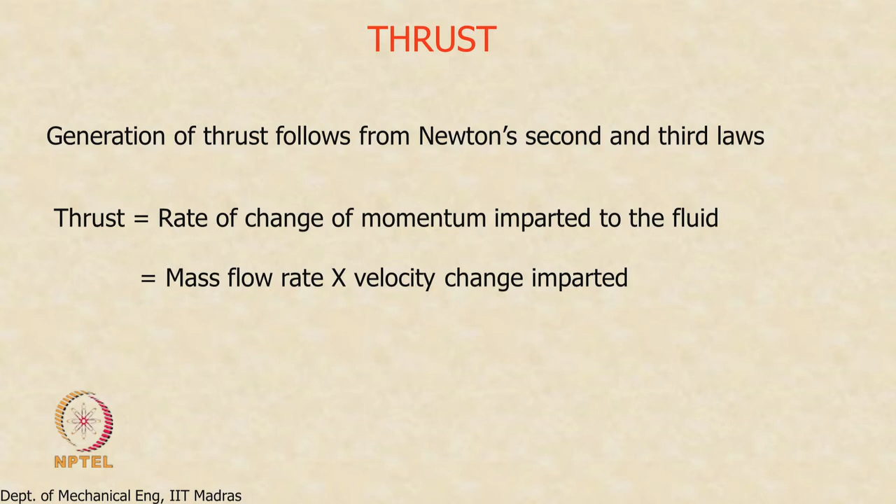Now, because thrust is the product of two terms, this offers the scope to develop engines which can develop thrust in two different methods. One is to keep mass flow rate very large and try to impart a small velocity change. The other strategy is to keep the mass flow rate reasonably smaller, but keep the second term quite large, imparting a large velocity change to a small mass of air. These are the two strategies possible, and if you look at how the engines were developed historically, you will see these are the two branches along which propulsion technology developed.

So we start with the requirement of generation of thrust, and historically thrust in aircraft engine application has been generated by two devices: one is the propeller, the other one is the jet.

Now the propeller, here is a view of a modern turboprop engine, you can see the propeller here. The propeller is very large, there is no duct surrounding it, it operates in the open atmosphere. Because the cross sectional area or tip diameter is so high, the propeller will suck in a large amount of air. So the propeller works on the first idea, impart a small velocity change to a large amount of air. It takes in a large amount of air and generates thrust by imparting a small velocity change to it.

Notice that the modern turboprop engine uses a gas turbine engine to run the propeller. It does not use a piston engine, this is actually a small gas turbine engine. So the propeller is directly coupled to the shaft of the gas turbine engine, and the engine runs the propeller.

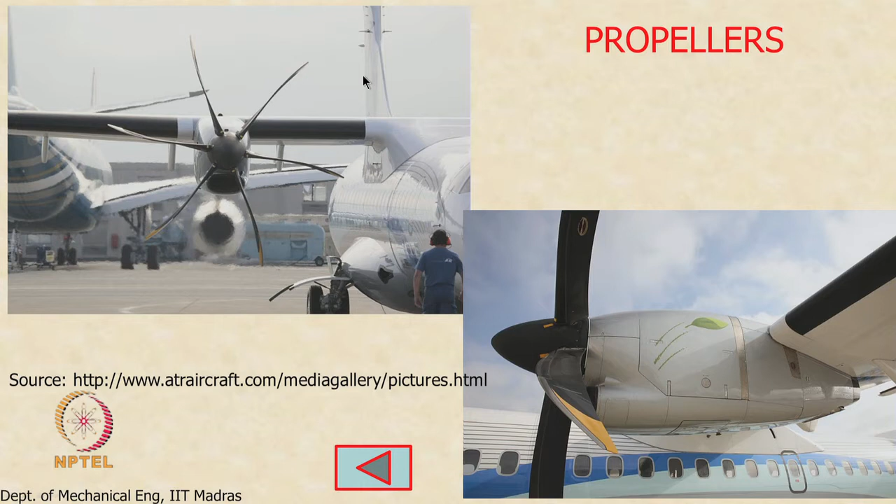That is why I said this is cold, and this has very significant implications later on. We will now turn to this and see what this does. Now the jet engine uses the opposite strategy. Here m dot is small and delta V is large. So it imparts a large velocity change to a small mass of fluid. That is what a jet engine does.

How do we do that? How do we accelerate gas to high velocities? This is a simple thermodynamic problem. We increase the specific enthalpy of the gas. As we discussed earlier, the specific enthalpy of a gas is nothing but U plus PV, where U is the internal energy, P is the pressure, V is the specific volume. There are two terms in this expression.

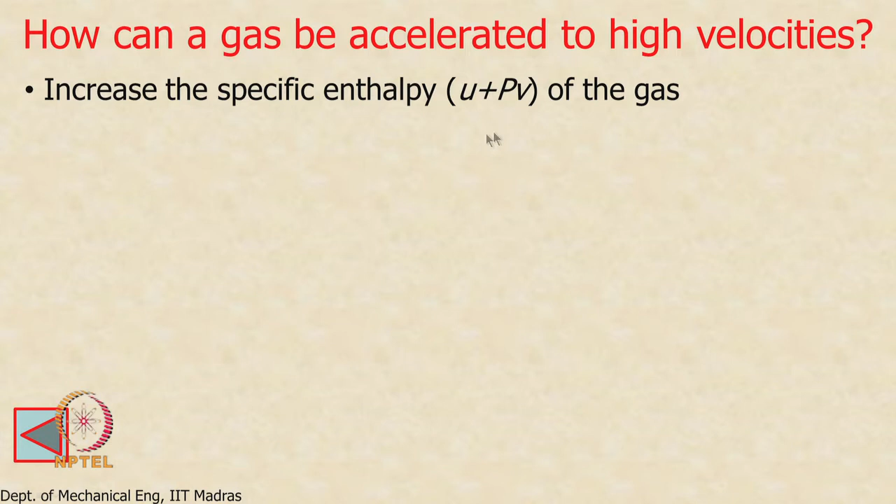So we can increase the specific enthalpy by exploiting or increasing these two terms. Once I increase the specific enthalpy, what do I do? I convert the enthalpy of the gas into kinetic energy. That is how I accelerate a gas to high velocities. How do I do these two things? That is what we are going to look at next.

So how do I increase the specific enthalpy of the gas? If I look at the second term, I can increase the pressure and increase the specific enthalpy, or I can increase the internal energy. How do I increase the internal energy of an ideal gas? As you know, these are almost thermally perfect gases, so the internal energy depends only on the temperature. So I increase the temperature, I increase the specific internal energy.

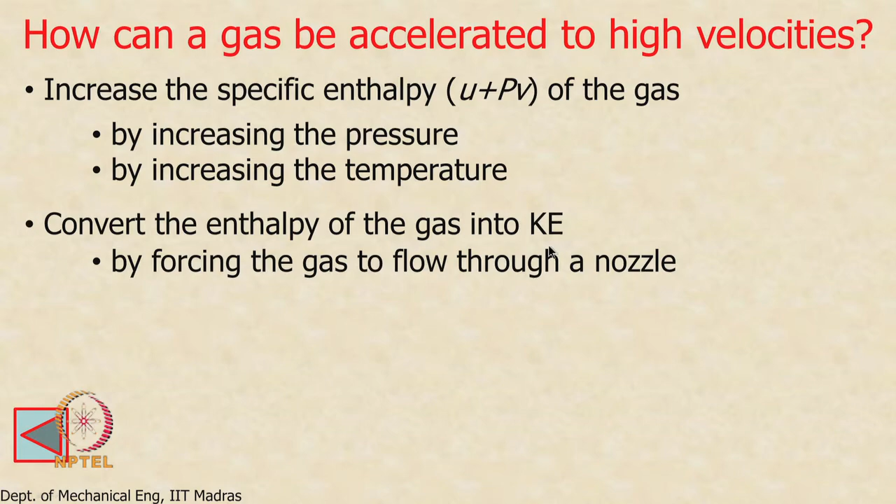So basically the gas turbine engine does two things. It increases the pressure, it increases the temperature, thereby increasing the enthalpy, and then converts the enthalpy into kinetic energy in a nozzle. How do we do this? We force the gas to flow through a nozzle where the conversion of enthalpy into kinetic energy takes place. So here is a look at a propulsion nozzle.

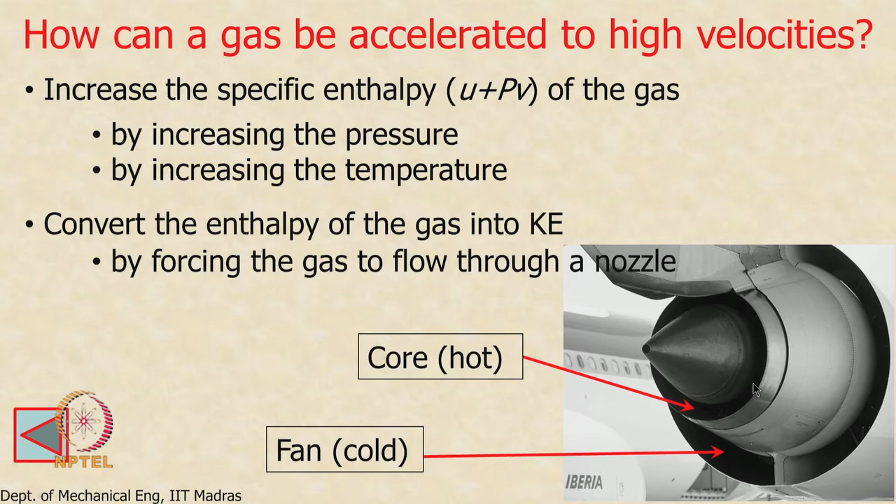By forcing the air to flow through these nozzles, we have already seen nozzle flows and applied the impulse function to evaluate the thrust. The enthalpy is converted into kinetic energy, and as the air leaves, the momentum imparted to the air is felt as thrust. We also said I can calculate the thrust by looking at change in momentum or by integrating the pressure on the metal surfaces of the engine. Both are nothing but Newton's third law.

That is how gas can be accelerated to high velocities, and a small mass of gas when accelerated to large changes in velocity can also produce thrust. This is how a jet engine produces thrust. So this is the difference between these two: jet engine has a smaller m dot, larger delta V; propeller engine has larger m dot, smaller delta V.

Historically, propeller engines have been driven either by a piston engine, around World War II, or, as shown now in modern times, driven by a gas turbine engine. This was before World War II, and the gas turbine engine, which is used today, is a turboprop engine, as I showed. These are driven by small gas turbine engines, and they are very efficient. Now jet engines, for the jet engine to operate, it needs a stream of high enthalpy gas.

It needs a stream of high enthalpy gas, which it will then force through a nozzle, converting the enthalpy to velocity. This requires an engine to supply high enthalpy gas, and that engine can be the gas turbine engine. In one case, the gas turbine engine produces the shaft power required to drive the propeller, whereas in the other, it gives the high enthalpy gas stream required to generate thrust. That is the difference between these two: one provides shaft power to turn the propeller, the other provides a high enthalpy gas stream used by the nozzle to generate thrust.

Now, the gas turbine engine itself has several variations. Turbojet is the simplest possible. Turbofan is a modern engine, which we will also look at. The afterburning turbojet is a variation of the turbojet engine, slightly more complicated, with additional functionality for the nozzle, which we will look at too. There is also a derivative called the turbo ramjet, which is a combination between a turbojet and a ramjet engine. We will look at this technology as we go along.

Now, there are engines that operate as both ramjet and scramjet, because their flight Mach numbers are higher. They can use supersonic intakes, properly designed, to decelerate the air and compress it. Remember, two things had to be done to the air to increase specific enthalpy: one was increasing pressure. In these engines, this is done by decelerating the air itself, so the momentum of the incoming high speed air is converted to pressure. That is what these two do. So they do not need a compressor, and consequently do not need a turbine either — they have no moving parts.

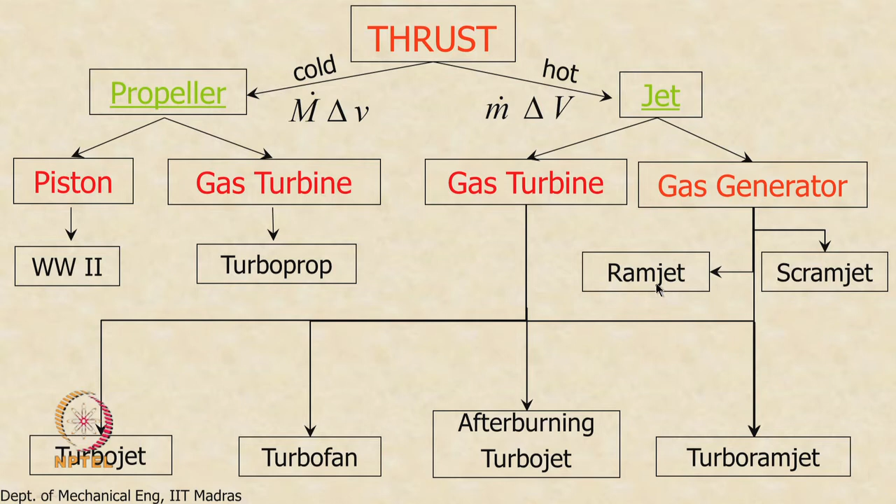We will look at each of these engines and have qualitative discussions in the beginning. Then, towards the end, we will try to do thrust calculations for a turbojet engine, a turbofan engine, an afterburning turbojet engine, and a ramjet engine.

Now, here is a slightly different taxonomy of propulsion technology based on flight Mach number. What we looked at earlier was a taxonomy based on chronology, how the technology developed over the years. Here we are looking at a different taxonomy using flight Mach numbers. Propellers typically are constrained to flight Mach numbers of about 0.5 or so. Even turboprop planes today usually fly at altitudes only around 15,000 feet, no more, because their flight Mach numbers are restricted to about 0.5.

Now, a turboprop is in that range. A turbojet and a turbofan typically operate in the high subsonic Mach number range, around 0.9 to 0.95. These typically fly at altitudes of about 35 to 40,000 feet, or maybe slightly more, because their flight Mach numbers can be high subsonic, so they operate at higher altitude.

Now, the afterburning turbojet can actually accelerate to supersonic speeds whenever required. It may not cruise consistently at supersonic speeds, but for short duration, by turning on the afterburner, you produce extra thrust and can breach the sound barrier and attain supersonic speeds — but not sustained supersonic speeds. This is not the way to go if you want sustained supersonic flight.

Now, the turbo ramjet is, as I said, a derivative of the turbojet and a ramjet. Ramjet operates at much higher Mach numbers, but because the ramjet engine has no compressor, it cannot take off or land like an ordinary aircraft. It needs to attain flight speed before the intake starts working. Remember, a supersonic diffuser can decelerate and convert momentum to pressure only when already moving at supersonic speed. So to get it to supersonic speed, you need some other engine. That is why the turbo ramjet engine is a combination of both: when it takes off or lands, it operates like a turbojet engine, and when it cruises in sustained fashion at supersonic Mach numbers, it operates like a ramjet.

So, for sustained supersonic operation, we use the ramjet part of the engine, and for takeoff, landing and reaching cruising altitudes, we use the turbojet part of the engine. So, in contrast to the afterburning turbojet, the turbo ramjet can actually cruise at supersonic Mach numbers for a sustained period of time, whereas the afterburner can only attain supersonic speeds for short durations of time.

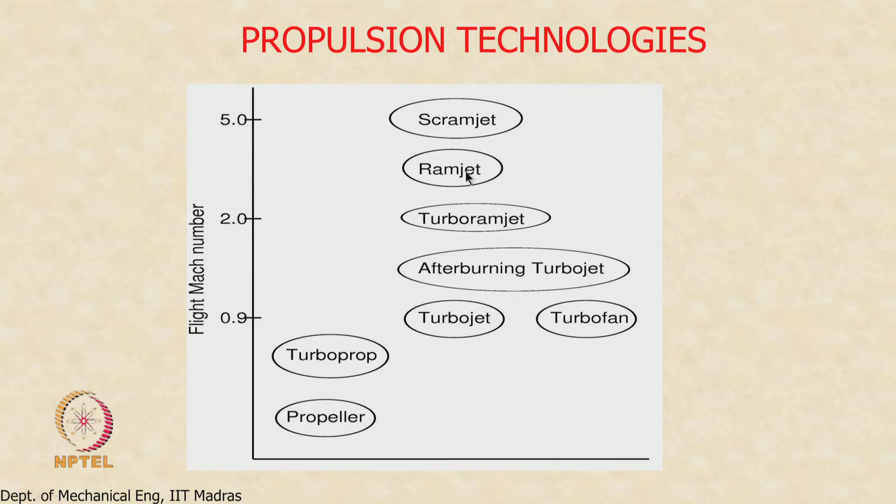Now, the scramjet operates at even higher Mach numbers. With ramjet, we are talking about flight Mach numbers of about 3 or so. Scramjet usually operates at flight Mach numbers of 5 or even above - 5, 6, or even 7.5 and so on. That is a very difficult technology to accomplish. Even to this day, it proves to be a challenge. The longest sustained scramjet operation is reported to be about 2 minutes so far. That is the record right now, and that is where the state of the art is for this.

Ramjet technology has been used mostly in missiles. We have both liquid fuel ramjet engines and also solid fuel ramjet engines. Turbo ramjet is a proven technology, very costly but proven. Others are all commercial technology which are very, very viable.

Now, what are the disadvantages of propellers? Before we start, our interest lies mainly in turbojet, turbofan, afterburning turbojet and ramjets. But it is a good idea to look at the other technologies to see the shortcomings and to see how these can be addressed in new technology.

It is always better to learn from others' mistakes and also learn from others' strengths. Propeller has advantages, it is very efficient, but it also has disadvantages. The tip rotates at higher speed than the hub - you can see the propeller has a very large diameter. So the tip moves much faster than the hub, and if you want to increase the cruise speed, the propeller speed also has to increase, understandably.

For these reasons, cruise speeds of propeller engine turboprops were limited to about Mach 0.5 or so, and Mach 0.5 is simply not a viable option both commercially and from a military perspective. From a commercial perspective, a transatlantic flight lasts about 7 hours, cruising at Mach 0.9 or 0.95. If you reduce it to 0.5, that means 14 to 16 hours or more, which is simply too long for a single flight. So there is always a push to increase the flight Mach number to make the journey time shorter from a commercial perspective. From a military perspective, faster means more maneuverable, more agile, less susceptible to attack from enemy missiles and so on. So there has always been a push to increase the Mach number to higher subsonic in commercial aviation and higher supersonic in military applications.

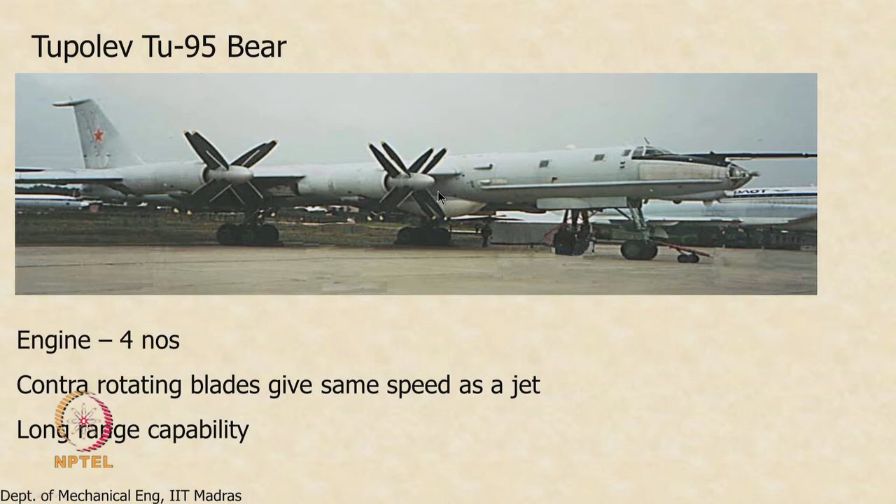So here is an example of what people tried to do. Engineers did try to improve the cruise Mach number of propeller engines to high subsonic Mach numbers, and this was the result - this is a Russian Tupolev Bear engine. As you can see, it has 2 propellers. They said we will add one more propeller to each engine and increase the cruise Mach number to high subsonic. It does have speeds comparable to a turbojet, there is no doubt about it, and it can fly a long range, but it is extremely noisy. It is said that you do not need a radar to detect this plane, you can use your ears - that is how noisy this plane is.

This technology never really took off; it kind of died some time ago, probably about 30-40 years ago this was tried and abandoned, but interestingly now it is making a comeback today.

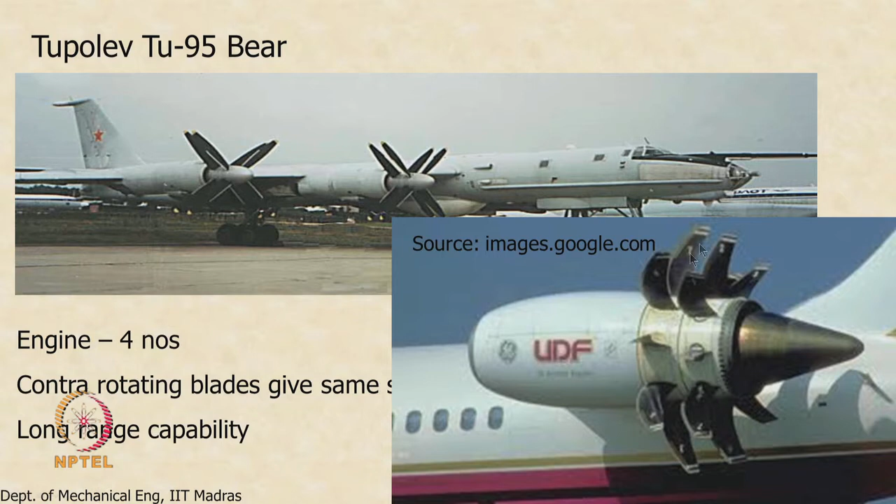So today GE has been experimenting with something called an unducted fan. You can see the contra rotating propellers, and one of the biggest advantages of this contra rotating propeller technology is that it is extremely efficient, even more efficient or comparable in efficiency to a high or ultra high bypass turbofan engine. So this is a very promising technology from an efficiency perspective, and GE has been trying to develop this technology into a commercial engine.

They have not been successful, but they are really making a big push to developing this into a commercial technology. Much of the industry is going towards high bypass and ultra high bypass turbofan engines, whereas GE is trying to see whether the unducted fan is a much more viable technology. We will look at these types of emerging technologies after we complete our discussion of the basic operation of the engine — we'll look at emerging frontiers in aircraft propulsion technology.

So now we will take a look at the operation of a basic gas turbine engine.

Here we are showing a comparison between a piston engine, multi-cylinder piston engine, and a gas turbine engine. Remember, both engines have to do pretty much the same thing. From a thermodynamic perspective, both try to do the same thing: you have to increase the enthalpy of a gas, so you increase the pressure and you increase the temperature. You increase the pressure by compressing the air, and you increase the temperature by injecting fuel and burning it in the airstream. Both do the same operation, but in a different manner.

In the piston engine, air is taken in and then compressed by the reciprocating motion of the piston, and then you inject the fuel and ignite it. Because the cylinder can do only one thermodynamic operation at a time — each cylinder can either do suction, compression, combustion, or exhaust — the power produced by the IC engine is intermittent. Although the thermodynamic processes are the same, the power produced is intermittent.

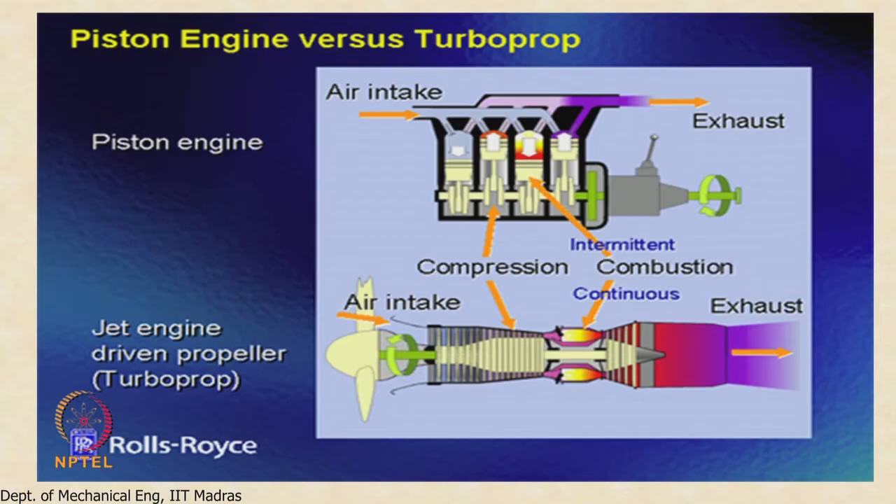In contrast, in a gas turbine engine the fluid goes through the same processes — there is an intake, a compressor, combustion chamber, turbine, and then exhaust. But here, at any given instant of time, the fluid in different parts of the engine is continuously undergoing all four processes. So this is continuous as opposed to intermittent.

For example, in a 4-stroke engine you get power only once every 4 strokes, or once every 2 revolutions of the shaft, whereas here you get power during every revolution of the shaft — not once every 2, but every revolution. So the power production is continuous here as opposed to intermittent there.

Now interestingly, because this can generate power continuously, in total contrast to what that committee had said, the power to weight ratio of a gas turbine engine is about 10 times higher than a piston engine. So what they thought was a distinct handicap actually was proven wrong, and it is exactly this reason why gas turbine engines have completely replaced piston engines or any other form of engine in aircraft applications, because continuous operation gives them a superior advantage of power produced per unit weight of the engine.

Of course, this being a very important metric, later on when we discuss new frontiers and new technologies, we will see the industry is still trying to reduce this — the industry is still trying to make the engine lighter for the same power. How do we make the engine lighter? They are looking at many different technologies. Not just when I say making the engine lighter does it mean you fabricate each component — you keep all the components and make them lighter. That is only one way.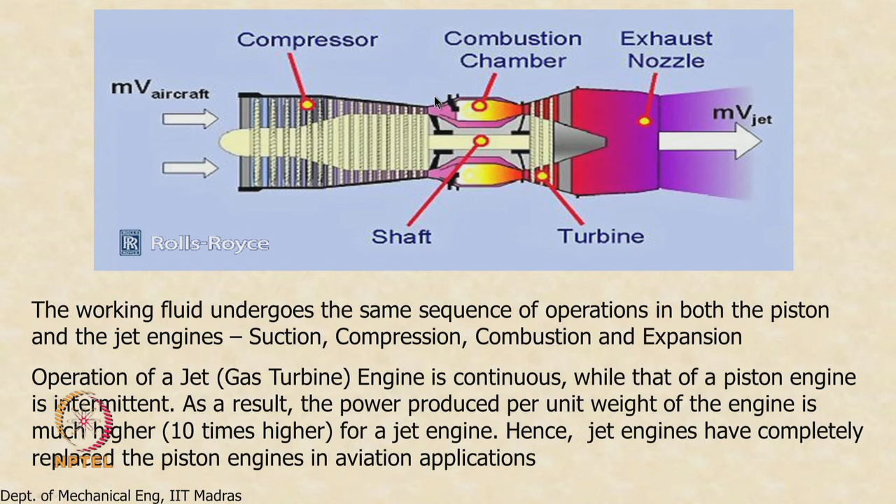Now let us look at this - the fluid has to undergo two major processes. Increase in enthalpy is accomplished by increasing pressure and increasing temperature. So what kind of pressures and temperatures are we talking about? If you look at the variation of pressure along the length of the engine for a turbofan, you can see the pressure ratio is about 40 for a modern commercial gas turbine engine.

You can see the pressure increasing, reaching its maximum value at the end of the compressor, at different rates in different parts - this is the fan, which we'll look at later. It reaches a maximum, and then in the combustion chamber the pressure remains more or less constant. Then the turbine is required to run the compressor, since the compressor needs power to compress the gas, so the turbine produces the power required to run the compressor.

So the enthalpy of the air - here you see increase in pressure, increase in temperature - the fluid has maximum enthalpy when it comes out of the combustor. Part of that enthalpy is extracted in the turbine and converted to work to run the compressor. The remaining enthalpy is then converted in the nozzle to produce kinetic energy.

Now look at the temperature variation. The peak temperature at the end of the combustor is about 1500 degrees Celsius - that's about 400 degrees Celsius more than the melting point of the turbine blade metal, as we'll show later. But still the turbine blade does not melt. That's the kind of thing we are going to look at - what technologies are being used today.

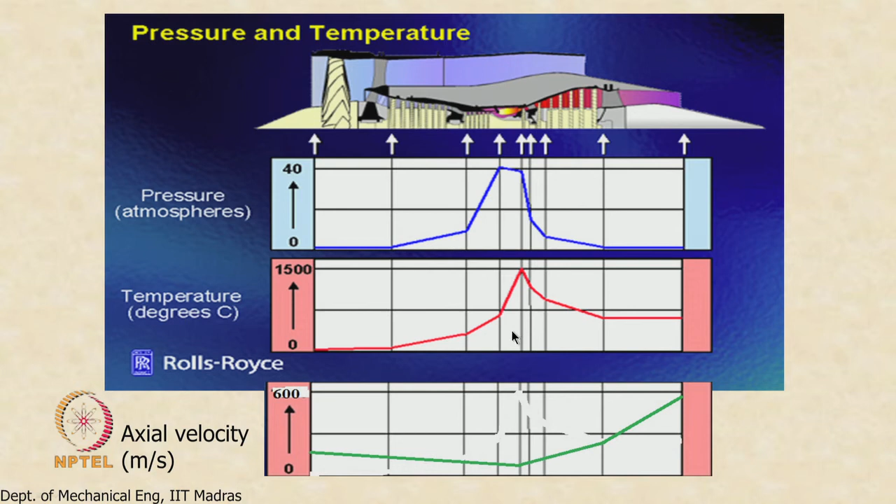In addition to aviation applications, gas turbines are also widely used elsewhere. One is the turboprop engine, which uses a gearbox to drive the propeller—the engine connects directly to the gearbox, and the propeller is run from there. Helicopters also use gas turbine engines, but with turbo shaft technology, a slightly different approach with no gearbox.

Gas turbines are also used in marine applications. Many large vessels use gas turbine engines rather than diesel engines to drive them. Some lighter vessels use diesel engines to drive the propeller shaft, but the bigger and more modern ones use a gas turbine engine instead.

This can also be used for land-based power generation. A gas turbine engine can be coupled to a generator to generate power. The advantage of a gas turbine power plant is that practically any kind of oil—furnace oil, heavy oil—can be burnt in the combustor, making it a viable option for land-based power generation.

So it is used not only for aircraft like the turboprop, but also in helicopters, ships and marine applications, and land-based power generation applications.

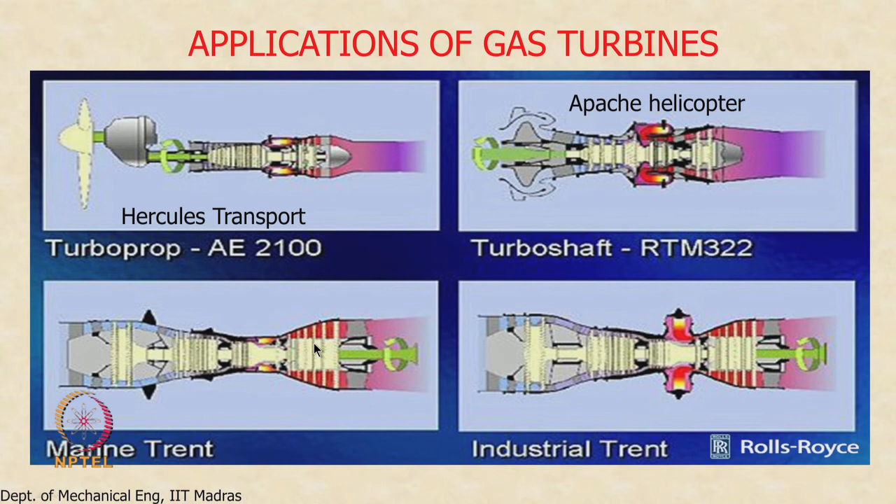One thing to note in this slide: as we go from one application to another, you can see an increased number of turbine stages compared to the others. This is because we try to extract as much enthalpy as possible from the fluid, since it does not have to go to a nozzle to produce thrust. When the fluid must go to a nozzle for thrust, we cannot extract all the enthalpy—some must be left behind to be converted to kinetic energy. In these other applications there's no need for that, so we increase the number of turbine stages to extract as much enthalpy as possible before sending it out.

Now let us turn our attention to aircraft engine applications, starting with the simplest, the turbojet engine. A schematic of the turbojet engine is shown here—you can see a very small inlet. For subsonic flight Mach numbers, the inlet plays no role; it is only for sustained supersonic cruise that the intake becomes crucial. We have a small intake, low pressure compressor, high pressure compressor, a combustion chamber, a high pressure turbine and a low pressure turbine, and then the fluid goes into a nozzle.

Okay, so this is the simplest form of the turbojet engine. Now, in the afterburning version of the turbojet engine, what we do is we take the nozzle part of the engine and make it longer, providing an afterburner duct. So you can see an afterburner duct here, a constant area duct, and the nozzle also has to be changed.

As we saw earlier, when you use an afterburner, the stagnation pressure decreases and the stagnation temperature increases. When the stagnation temperature increases, we need to increase the throat area of the nozzle. So you need a variable area nozzle when you use an afterburner, and you can also see the flame holder and the fuel spray bar.

The air at the end of the low pressure turbine comes out and we inject more fuel into it. Normally in a gas turbine engine, there is still plenty of oxygen left in the exhaust gases. So we spray fuel into the air, and because the air is moving at speeds of maybe 200-300 meters per second, it takes a while for the fuel to mix with the air. Combustion starts some distance downstream, which is why we have these flame holders to facilitate combustion.

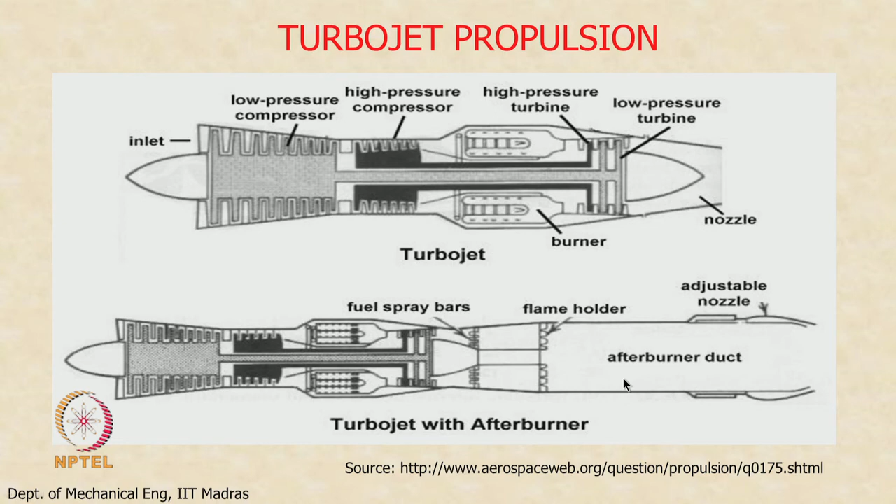Combustion starts here and the fuel starts burning, increasing the stagnation temperature and thereby increasing the thrust. But this can be utilized only for short durations, to punch through the sound barrier and attain supersonic flight speeds, because it can be extremely inefficient from a fuel consumption standpoint. But for military aircraft, especially for bursts of acceleration, this is an extremely good technology to use—for taking off from an aircraft carrier and for sudden bursts of acceleration during combat maneuvers.

But for sustained cruise, we need to employ a different technology.

So the turbojet, as we said, produces thrust by causing a large velocity change to the fluid. Because the fluid comes out at high speed and mixes with the ambient air, which is pretty much quiescent, it creates a lot of aerodynamic noise. The propeller creates a lot of mechanical noise, whereas the turbojet creates a lot of aerodynamic noise.

So when a turbojet engine takes off, at certain points, if you are sufficiently close, the noise levels can be as high as 140 to 150 dB. So the aerodynamic noise can be very, very high. The propeller produces mechanical noise, whereas this produces aerodynamic noise, but we can cruise at high subsonic speeds and with an afterburner even reach supersonic speeds. So these are some of the downsides to the turbojet engine.

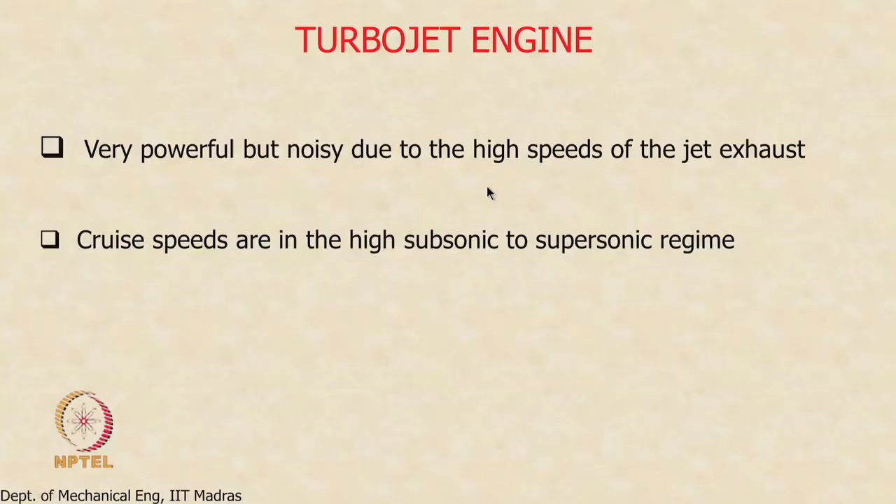The afterburner can give thrust augmentation for short periods of time without increasing the engine size too much. If you want the same acceleration by fitting another engine, you can do that, but that adds a tremendous amount of weight. So without increasing the engine size too much, we can actually have thrust augmentation for short periods of time.

It is highly fuel inefficient, as the afterburner is not at all designed to be a combustor. It is just a constant area duct where you dump the fuel and burn it—not really a combustor, just a duct. It is not a very efficient way of doing combustion. As I said, it is usually used in military applications during combat, for taking off from aircraft carriers which have very short runways.

Even with the catapult used on an aircraft carrier, the afterburner is required to actually get airborne when thrown from the carrier. The runway length is just too short, so full afterburner operation is required for taking off from an aircraft carrier. And as we saw in our gas dynamics lectures, the convergent nozzle area has to be increased during afterburner operation.

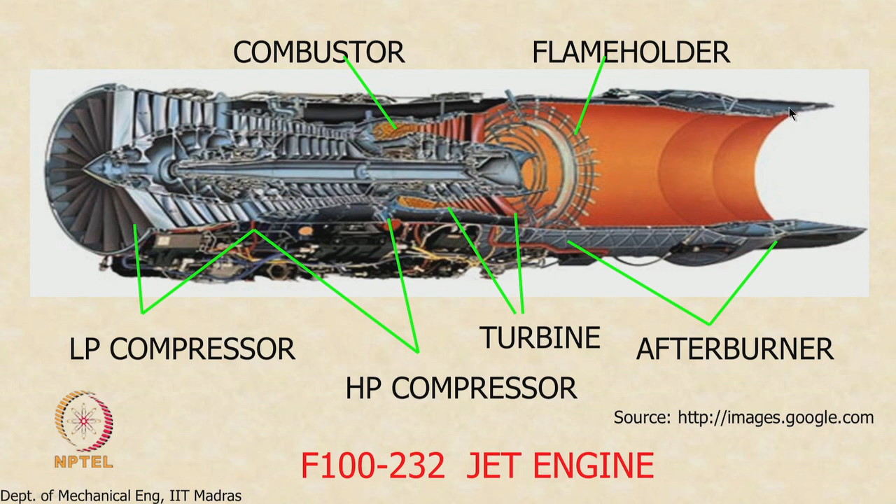Let us take a look at a couple of afterburner engines before we complete this lecture. This is an F100 afterburner engine. You see the normal engine up to here, then the flame holder, the afterburner duct, and the nozzle, which is actually a variable area nozzle. I will show close-up views of this nozzle later on.

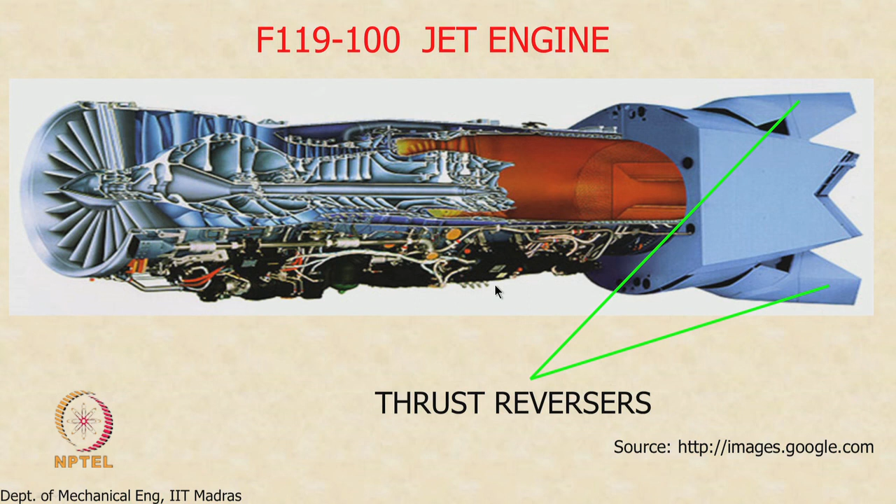One more—this is an F119 jet engine, similar kind of technology. You see the compressor blades, the turbine blades over here, and the afterburner duct, and in this case you also see the thrust reversers. We will take a close-up look at the thrust reversers later when we discuss propulsion nozzles. So we will stop there and look at a detailed analysis of the components of the gas turbine engine in the next class.